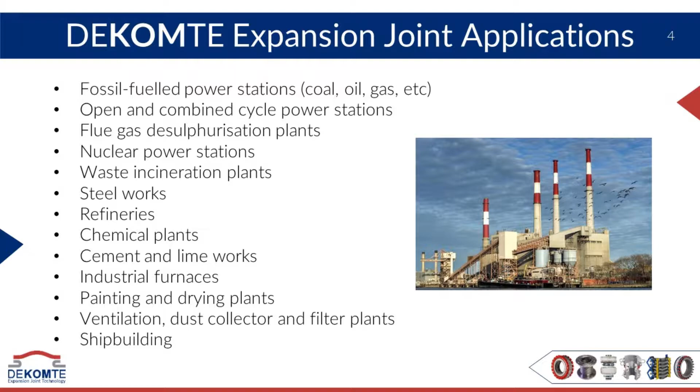We're able to cover a wide range of industries. Our main focus is power generation, so gas turbine exhaust systems. Combined cycle plants is our strongest market segment, and we're supplying that in both OEM, those original equipment manufacturers like Siemens, Mitsubishi, GE, but also in the retrofit and aftermarket. We see those two camps of requirements being quite different.

With the OEM, we understand the drive of cost and building the plant to a low capital cost for immediate functionality and immediate operating ability of the plant. In the aftermarket, we understand the long life requirement, higher cycling requirement, and more arduous operating duty that the plant needs to achieve, to generate income over a much longer period of time. We're working on lots of other types of plants too, so if you have other specialist applications, please reach out to us.

Within a combined cycle plant, the key location for the expansion joint is very much the GT exhaust. This is the key position due to the temperature, pressure, and high movements. But DEKOMTE is also supplying expansion joints across the rest of the package - this means the air inlet system, inlet duct system, ventilation package, and then on the HRSG duct or diverter bypass system, the penetration seals and stack outlet expansion joint. So across the whole package, we're able to support your requirements.

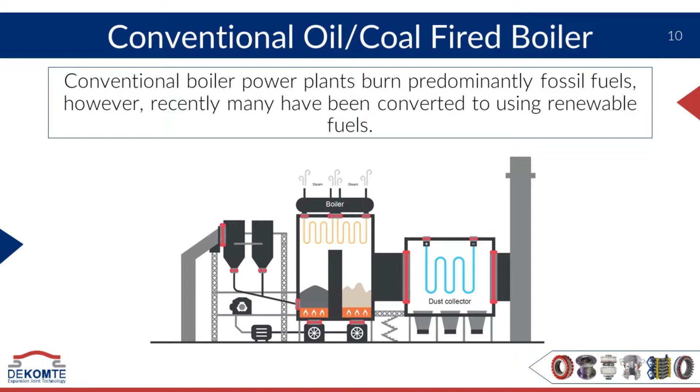DEKOMTE is also supporting and supplying to conventional boiler plants. And when we talk about conventional boilers, of course there are still coal-fired plants available, and these are still being built in some parts of the world, but we're also supplying to biomass, waste to energy, incineration, pyrolysis plants. These are also in heavy construction these days, with many more units coming online.

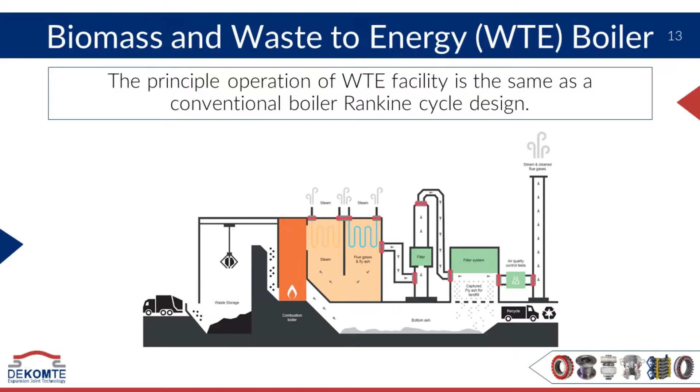DEKOMTE uses its engineering capability to focus on the problem areas of plant, and as I said earlier, the same focus of difference between OEM and aftermarket comes into play, and there are lots of different applications around the plant which I'd like to touch on in these next few slides.

So we've got from the pulverizing coal mill or the fuel handling systems, air handling ductwork, right through to the incineration side on the boiler, top dead space, all penetrations on the boiler package, and then everywhere from the flue gas treatment system through to the exhaust and the chimney stack. There are lots of different expansion joints, and we're supplying both the metallic types and fabric types across various aspects of these plants. So if you have one of these plants, please reach out to us and we can tailor a specific solution to meet the requirements you've got for better reliability and lifetime.

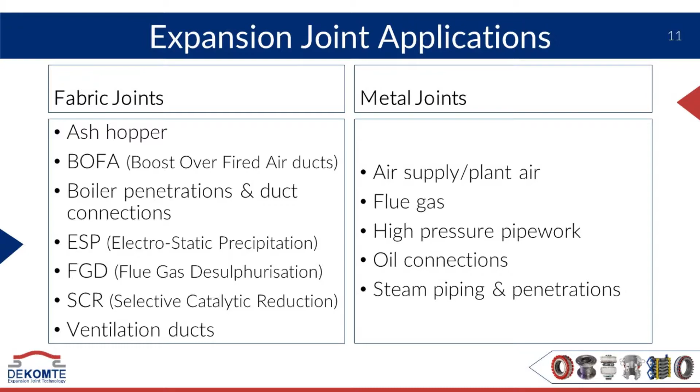The starting point of working with DEKOMTE is to establish the right technical specification, because when we ask the right question, we can deliver you the right solution. Technical specification, from the OEM, is very different from what we get from the aftermarket. From the OEM, the driver is a low capital cost initial value proposition that delivers the operational target for the plant, which is different from the aftermarket, where a plant requires higher reliability and longer life with more cycles.

So the inspection of how we create that specification is really important. That starts by us coming to your site and doing a visual and thermographic survey, identifying every location, the current condition, and what type of maintenance life we expect from each of those products. We hope to help you create the right maintenance strategy, what you need to budget for, and which expansion joints need to be changed at which intervals.

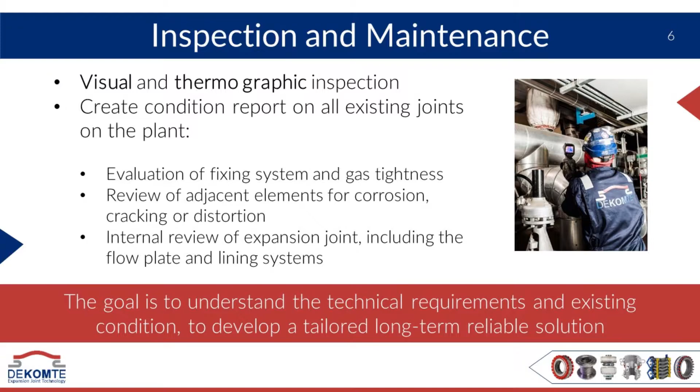Going forward in your future outage plans, that thermographic survey also helps document the annual progression in degradation of these products. We think we can help you develop a much longer lifetime view and a preventative maintenance approach, taking proactive actions rather than just waiting for failure and having to replace the complete solution or product.

What to look for in these products and areas of the plant is not just the expansion joint. We really need to look at the whole encompassing area, and this is also a critical point in defining how DEKOMTE can support you and how DEKOMTE is different from some of our competitors. We're not just looking to supply a new membrane, whether a metallic bellow or fabric expansion joint.

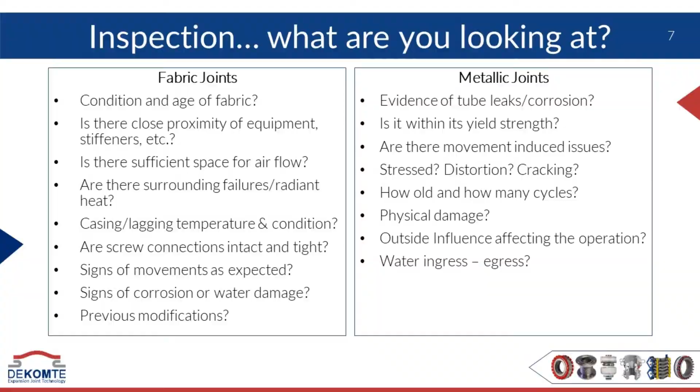What we're looking to do is consider the complete solution - integrated to the adjacent steel parts, duct stiffeners, duct supports, adjacent insulation, internal liner or cladding plate systems. The whole package of how the expansion joint ties into the surrounding HRSG or gas turbine exhaust casing is what determines much better reliability for the longer term.

I've listed some points here that hopefully can help you in the inspections and maintenance you're doing, but I hope you also reach out to our local team about how we can come and support you with inspections. It's also key that we talk to you about how you operate the plant.

The requirements in exhaust ducts from base load to cycling or mid-merit operation or peak loading have a dramatic difference in the thermal gradients across the duct system and the stresses that occur. The expansion joint is one of the weakest elements of that system, so we need to know how you're going to operate the plant, which should form a key part of the specification defining the new requirements.

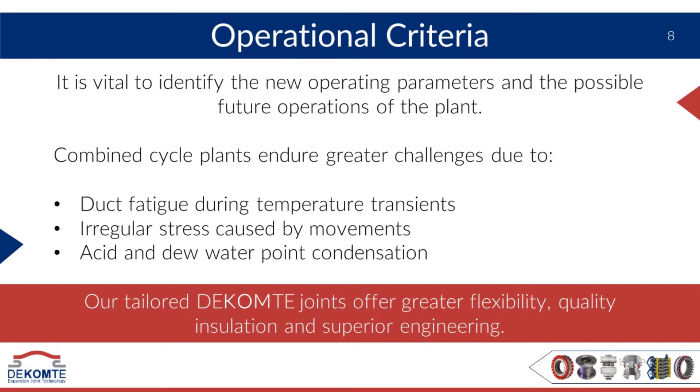The first section I want to touch on, in a series of case studies, is the gas turbine exhaust expansion joint. In the GT exhaust, we see very high temperatures, normally around 600 degrees Celsius. In the new larger gas turbines, we're seeing almost 650, so around 1200 Fahrenheit. These very high temperatures create critical stress factors for the exhaust duct system and equally for the expansion joints.

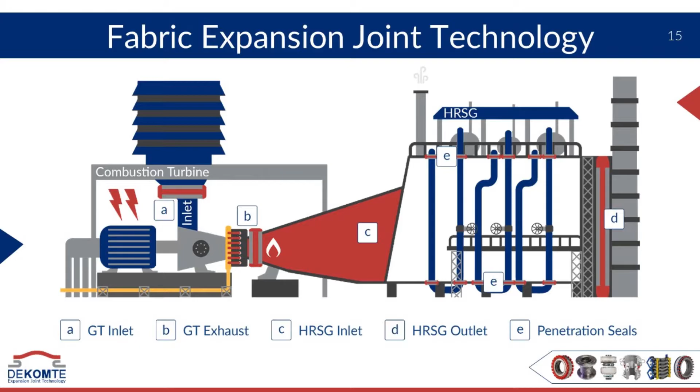There are two types of system: the old traditional design of a hot casing with externally insulated expansion joints, and the more modern approach, which is the cold casing exhaust duct system.

When we look at all the gas turbines available in the world today, they all have a diffuser which has a hot casing connection. So typically we see the expansion joint as the transition from this hot casing connection to the cold casing of the bypass, diverter, or the HRSG inlet duct section or stack system.

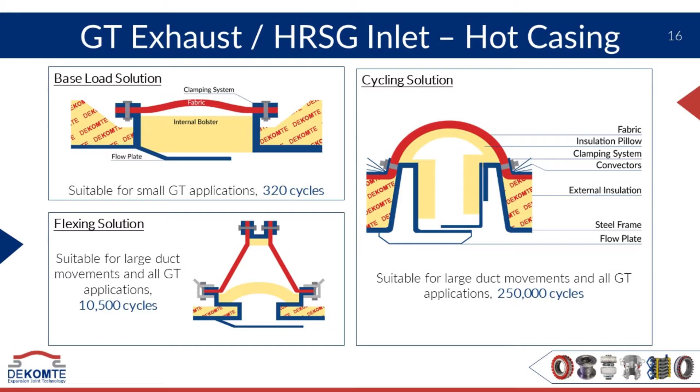In this hot casing system, the expansion joint framework is the key to the design, and DEKOMTE have some very unique systems available that are able to give a very high cycling for these expansion joints, and that's all about reducing the temperature gradient. I show a short snapshot here, but we'd really love to describe to you, if applicable, the real detailed engineering behind this solution. The key is temperature gradient in the steel frame to increase that cycling capability.

This is a well-proven concept, and we've delivered more than 500 of these units worldwide. It's proven both by finite element and CFD analysis in our engineering department, but also more importantly by real world testing and real world installation and reference. So this is a great solution which really can add significant reliability for the plant.

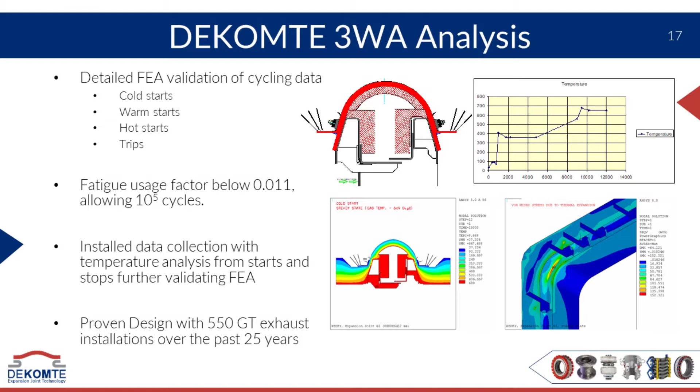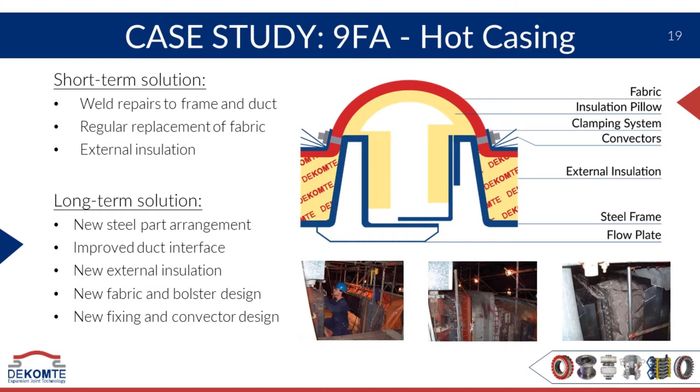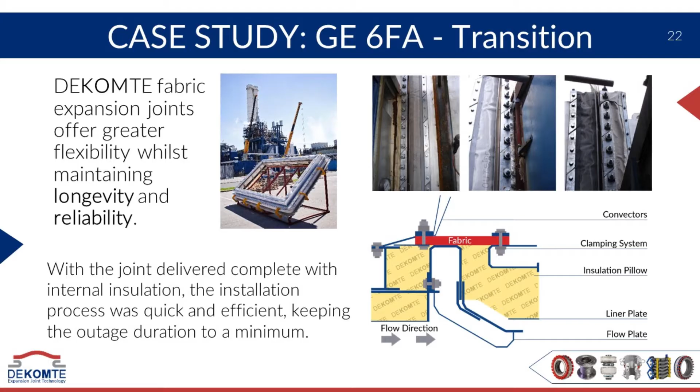We have this solution installed on various gas turbine types, from the gas turbine frame 7, frame 9, also through to the 7F, Westinghouse or Siemens machines, and the frame 6 gas turbine. The key application is this transition from hot to cold casing, but we're also supplying the hot to hot for older machines and the cold to cold in newer applications and newer gas turbines and HRSG inlet ducts.

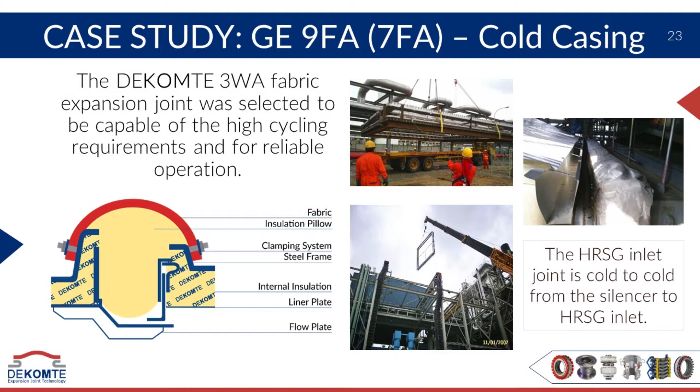Very often we're delivering the expansion joint as a kit of parts because we're providing all the field erection services as well as a turnkey product, and this means that we're supplying and assembling on site and retrofitting in the field with all the manpower required to accomplish the complete works within your outage time frame.

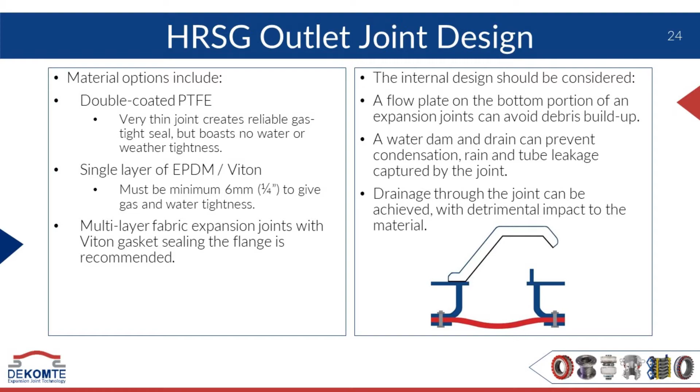I'd also like to quickly touch on the other joints available in combined cycle plants, the HRSG outlet expansion joint. This expansion joint is lower temperature, but we need to give other considerations to dew point, corrosion, condensation issues which are more environmentally concerning about the leaking of flue gas before the exhaust stack system. So we need to consider different materials.

I think it's also key here to say that sometimes we focus on the high temperature expansion joints when actually there are some other types of challenges which are still critical in lower temperature duct systems.

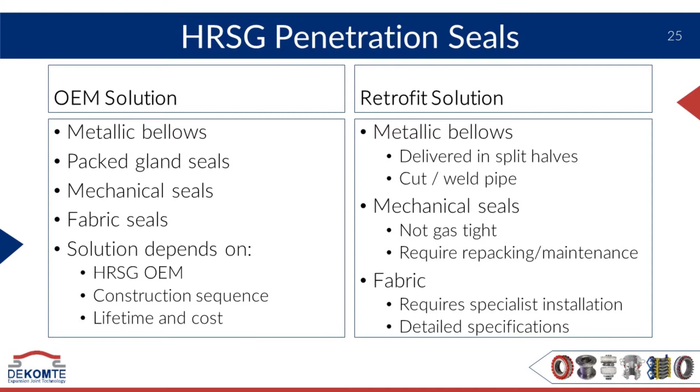Penetration seals are another key application for HRSG applications, and we're supplying both OEM metallic bellow and fabric seals, and also retrofit fabric expansion joints. We've got a short video here we can just show you of how that operates.

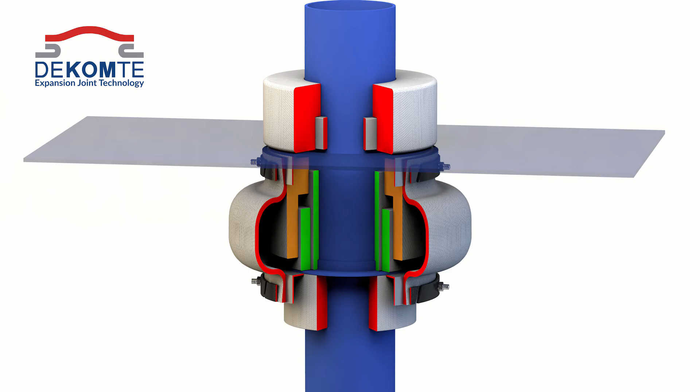The key part of how these pen seals operate is all of the internal parts. I mentioned earlier about integration of a product, and here in this small expansion joint we show one of that as a feature: the casing insulation pillow, the pipe jacket insulation system, and then all those interlocking insulation parts inside the expansion joint. Then there's a formed expansion joint, which is also a DEKOMTE key feature, a formed joint which allows better movement and flexibility of the expansion joint with no creasing or folding up.

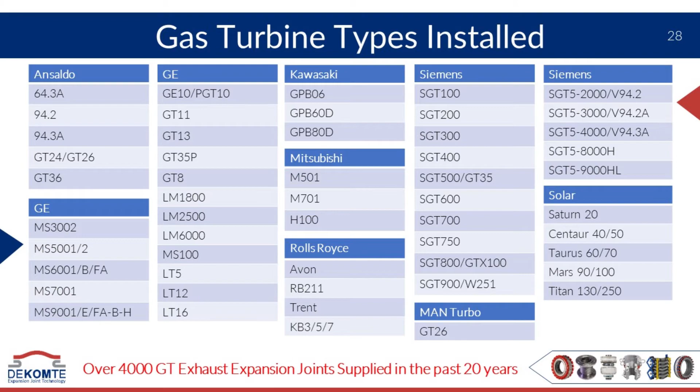DEKOMTE is OEM approved for a wide range of gas turbine types, and I show you here just a snapshot of many of those types of gas turbines which we're installed across, both OEM and retrofit.

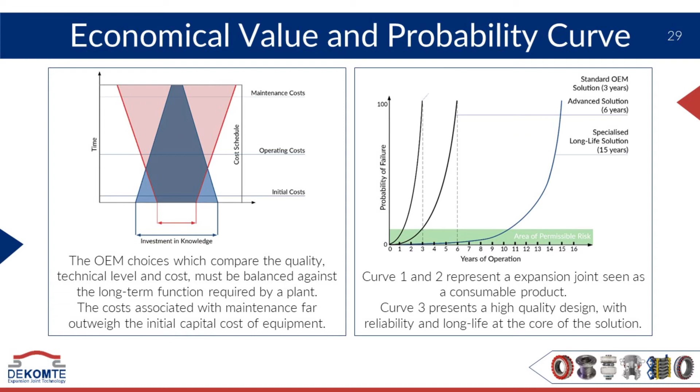It also comes down to offering you the options available at the beginning. We can offer you a 1-year warranty solution that's suitable for maybe 3 years of life, up to a 6-year warranty solution which is applicable for more than 10 years of life. Of course, these all come at a value. We need to work with you on what the value you see in the plant is in a longer life solution.

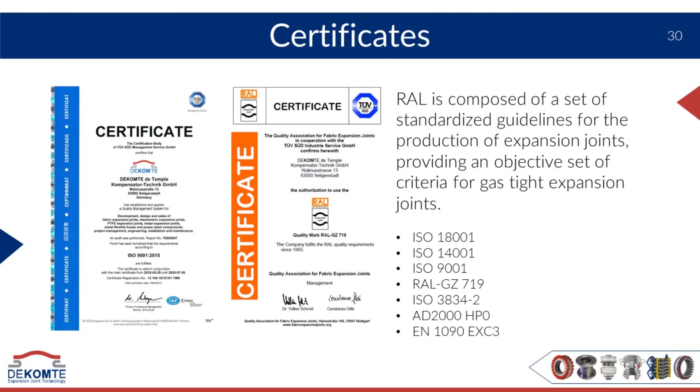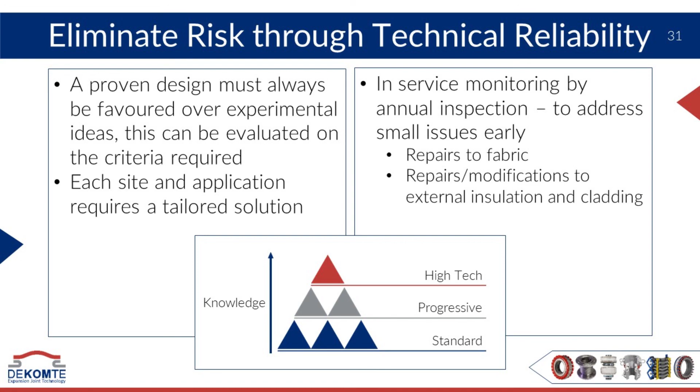DEKOMTE is quality assured to the highest standards. We're a leading company in a quality association focused on expansion joints called the RAL, and we'd like to talk to you about that if you're interested. We can share with you quite a number of resources about quality documentation, quality resources, design standards, in order that you're able to evaluate and compare more easily suppliers available on the market.